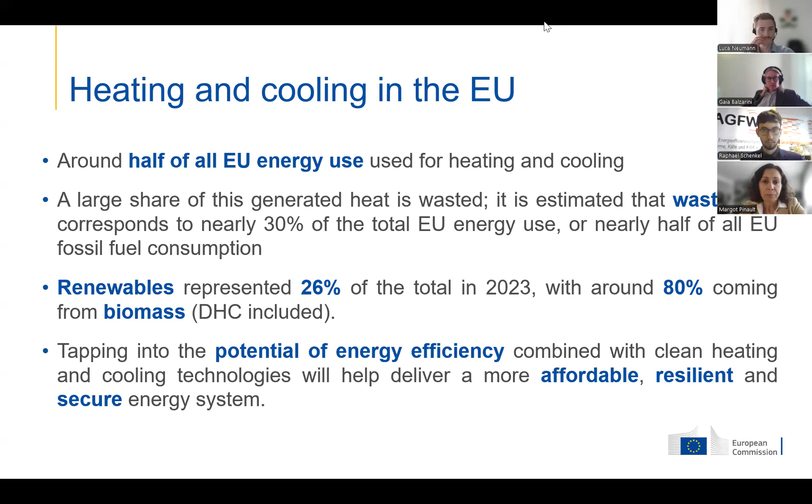Starting from the planning requirements through infrastructure development and deployment, through targets as regards increasing renewables and energy efficiency. So starting with the Energy Efficiency Directive, there are planning requirements for the national level, and what is new is also local level planning that will need to be delivered by all municipalities over 45,000 inhabitants, as of the transposition deadline of the EED.

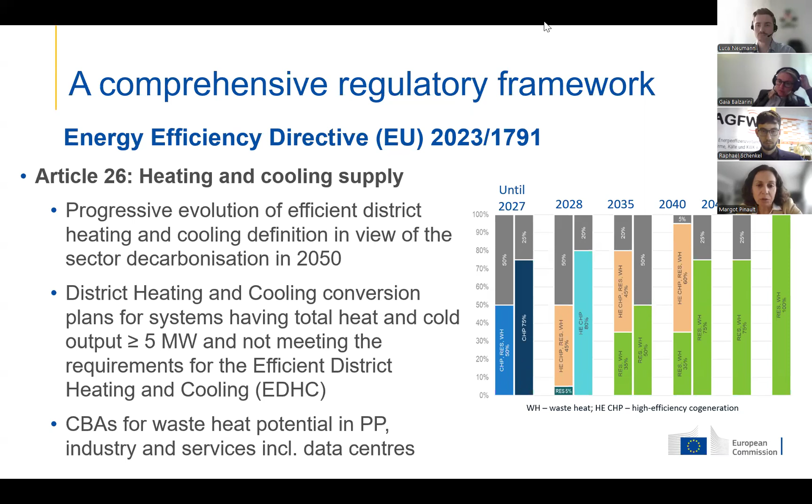In addition, this article includes measures related to waste heat potential assessment. This will be done through the CBAs, cost-benefit analyses, that are mandatory for industries, service facilities, including data centers, and power plants, all of this above certain capacity levels. And this awareness needs to be increased among economic operators: what is the waste heat potential? And then also member states need to link it to the permitting criteria to see how to best use this potential.

Finally, I'm going towards the Renewable Energy Directive, which has strong provisions on increasing the share of renewable energy in heating and cooling. First of all, a binding national target of 0.8% currently and 1.1% as of 2026 of annual increase of the share of renewables in heating and cooling supply. And there is an option also to count waste heat or renewable electricity if driven by the heat pump, but with a cap of 0.4% for each.

Next, there is another target in the RED directive that is non-binding, but that applies specifically to the district heating and cooling sector, of 2.2% per year of increase of renewables in the supply of heating and cooling. But there are many other provisions which are of interest for our discussion today. For example, the cooperation framework between district heating and cooling operators and electricity DSOs.

This is something very important because we would like to see better system integration and better, more regular interactions between these two sectors, especially at local level, because there are joint benefits to be developed. There are services that district heating and cooling systems can provide to the local electricity grid in terms of flexibility and thermal storage. And for this, the regulatory requirements exist already and need to be effectively implemented on the ground, and this will be also in our focus.

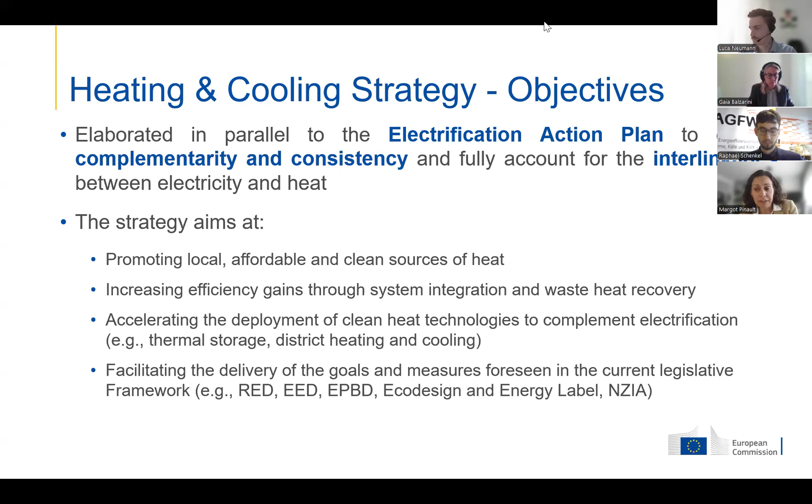So it's really complete, and now we need to make a good use of it and make it effectively implemented on the ground and create the right synergies. So the heating and cooling strategy will focus on planning, networks, efficiency gains, clean heat technologies and resources, affordability, and competitiveness.

We will look at heat as an energy carrier in its own right, with proper planning rules and practice, and also its own infrastructure, its development, financing, with stress on the interactions between the systems of electricity and heat, and better use of waste heat, so that on this continent where we have scarce energy and costly energy, we do not waste energy anymore, and we try to really optimize all the energy flows that we have available.

We'll be looking, of course, at the clean heat technologies deployment. What are the market conditions to speed up this deployment? Starting from heat pumps, but also direct renewable heat from technologies that can grasp the heat from nature, like solar thermal or geothermal.

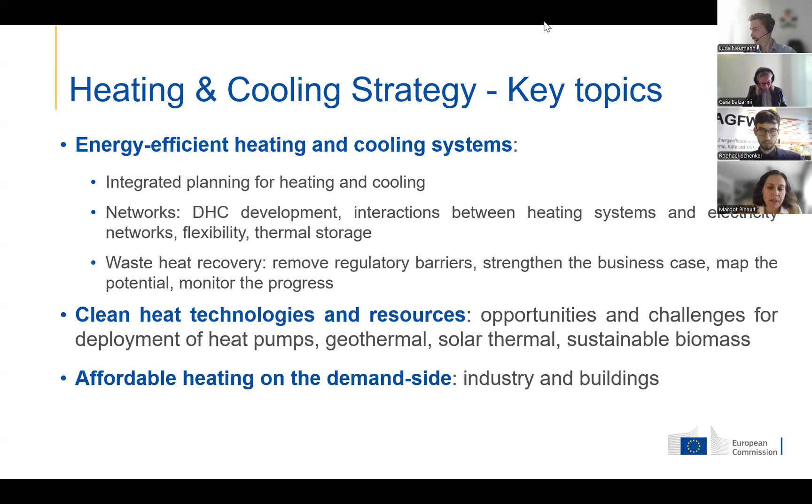That's our aim. So on the timeline, we are currently consulting stakeholders. So you are all very warmly invited to take an active part in the call for evidence that closes in 3 days, on the 9th of October, and in the open public consultation that lasts a little bit longer until 20th of November. We are planning a stakeholder event on the 7th of November, which will be hybrid, but will be in presence in Charlemagne, so the Commission Conference Center. We didn't yet send the registration link, but it will come soon.

And as regards the strategy, it is planned for adoption end of first quarter of 2026, so end of March, I would say. So that's everything that I can present you at this stage, and happy for the further discussion. Thank you very much.

Thank you, Margot. Thank you for giving us this comprehensive overview of the upcoming heating and cooling strategy in the context. Well, with that, I will focus on what are the demands of the DHC sector towards this heating and cooling strategy. I'm not going to repeat the numbers. We have seen it with Margot's presentation.

Heating and cooling is one of the most overlooked sectors when it comes to the decarbonization of our energy system. And if we really want to achieve our decarbonization targets by 2050, we have to transition to clean heating and cooling. And this is not just a matter of cleanly warming our homes or cooling our industries. And we have seen it in the past. It's also a security and geopolitical imperative.

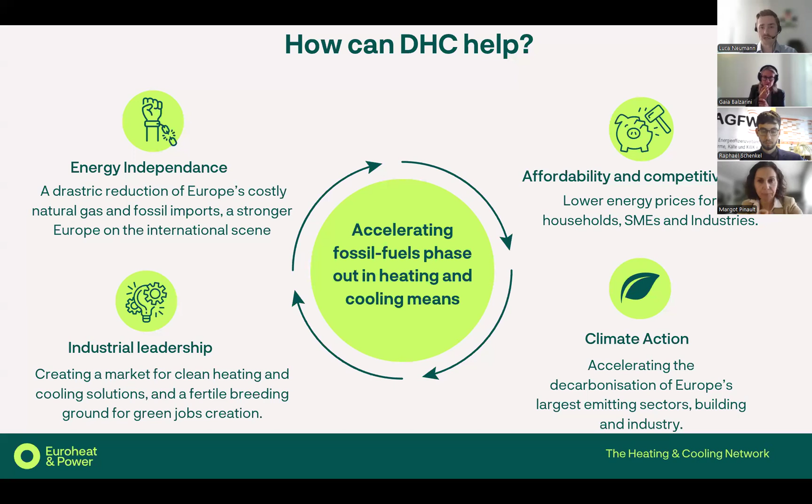So just to sum up the slide, this is how DHC can help with affordability, energy security, competitiveness, and of course, our decarbonization goals. But how can we get there? Well, a study by the University of Aalborg suggests that by 2050, in a fully decarbonized heating and cooling system, we would have to have 55% of district heating and cooling.

So what we need for that is, first of all, we need to lower the energy costs for affordable, clean heating solutions. And one of the ways, because the measures that are mentioned here on the slide are only a cutout of our, let's say, catalog of measures.

One of the ways is to increase system flexibility, and Margot mentioned it, was a more integrated approach to energy systems, which think of heating and electricity infrastructures together. And there, I think it's very positive to see that you are developing the heating and cooling strategy in parallel to the electrification action plan.

We also need to make it easier to access clean heat solutions. I think many people have made this personal experience that when the gas boiler breaks down, it's really not easy and affordable to switch to a clean heat solution. And one way to address this is to help municipalities to fully develop and implement heating and cooling plans. And we'll later see how this is, for instance, happening in Germany. Because heating and cooling plans, they lay out in which community, which clean heat solution is the best choice.

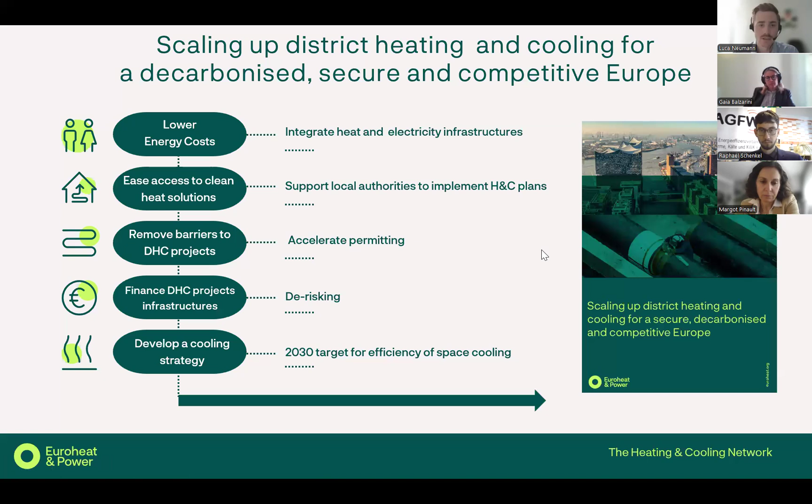I'm not going to dive any deeper, but I invite you to consult after the call, of course, our full position paper on the website. And with that, we're moving over to a hands-on presentation on how we can tap into waste heat recovery. And I hand you over the floor, Gaia.

Thank you. I hope that you can make the transition for me, as I'm not able. I will do that. Yeah.

Thank you. So my presentation is about how to manage and how to provide transparency on the opportunity around waste heat. And this has the ambition to accelerate the transition toward a decarbonized heating and cooling strategy. If you can go to my first slide.

Thank you. Okay, then we start from the elephant in the room, I would say. That's the figure you see here, 2,860 terawatt hours per year is the amount of waste heat that Europe is basically rejecting. How is that rejected? Normally, waste heat is originated in an industrial, but also in a hospital or in a data center, by a cooling process that is rejecting the energy that is needed in order to cool down that specific process.

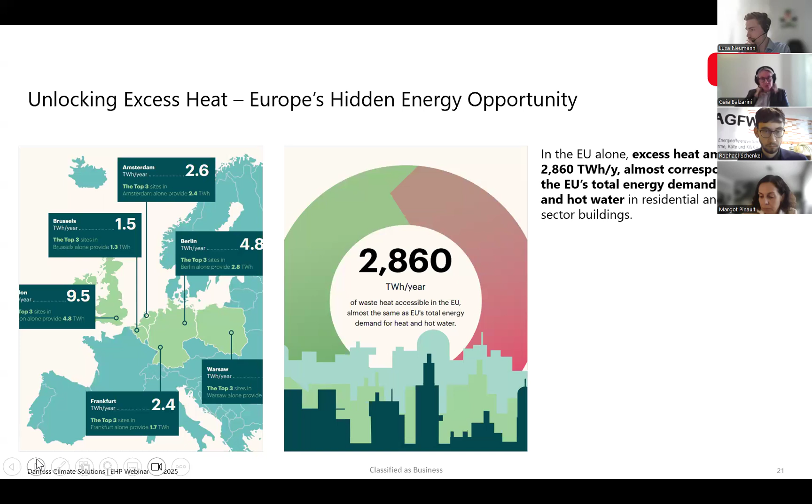And to give you a size of this value, basically these 2,860 terawatt hours correspond to the European total energy demand for heating and hot water production in the residential and service sector buildings. This is really a huge opportunity that we are missing. On the left side of this slide, I have reported the typical need of energy in several different capitals. And basically, you can see that the top three rejectors of waste heat could cover that need just by having three players delivering waste heat recovery to the network. If you can go to the next slide, please.

But why is that? Why is it that on a global level, 72% of the energy is currently lost or rejected? That's first of all because we are missing familiarity and awareness around the opportunity of waste heat recovery, around the business case of waste heat recovery, but also we are not really familiar with the legal framework that is needed to be assisted in that kind of investment.

And then we all know we are still dealing with very high electricity prices. And why is electricity involved? That's because in most cases heat pumps are needed to improve the quality or the temperature of the waste heat recovery system to the level that is needed by the user or the district heating network.

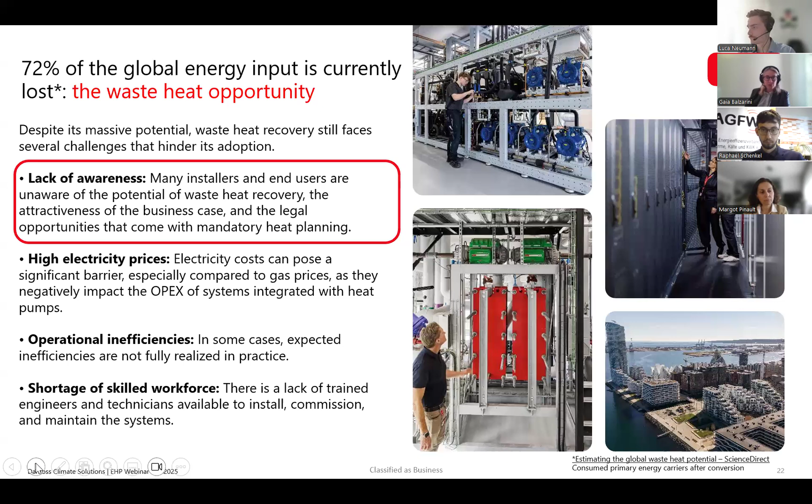And then the third element that we need to take into account is that designers and installers still lack skills to properly design, install, commission and maintain the system. And this is leading to operational inefficiencies that are affecting a little bit the credibility of this technology, which at the end, from a technological perspective, is using consolidated components. So it's a pity. Next slide, please.

For this reason, at Danfoss last year, we have invested resources to develop a tool which is called the Heat Recovery Tool. That's a free tool. You can get access from our website. I have added a QR code that you find on this slide here.

And this recovery tool is basically providing all of this missing information that is normally needed for a potential investor or stakeholder to decide whether it makes sense or not to invest in a waste heat recovery system. And basically what we do, I have here on the right side of the slide an example of a traditional system where there's a consumer of heat, maybe for heating a building, that is previously using heat from a traditional boiler, and instead we look at reusing the excess heat.

Let's take the example of a hospital, from the cooling system of the hospital, that through a heat pump can be recovered and then directed immediately into the building. But as most of the time the need of the building will be more than covered, the remaining part can be directed into a district heating network that at the end enables the full efficiency of the recovery system, and this makes the business case positive.

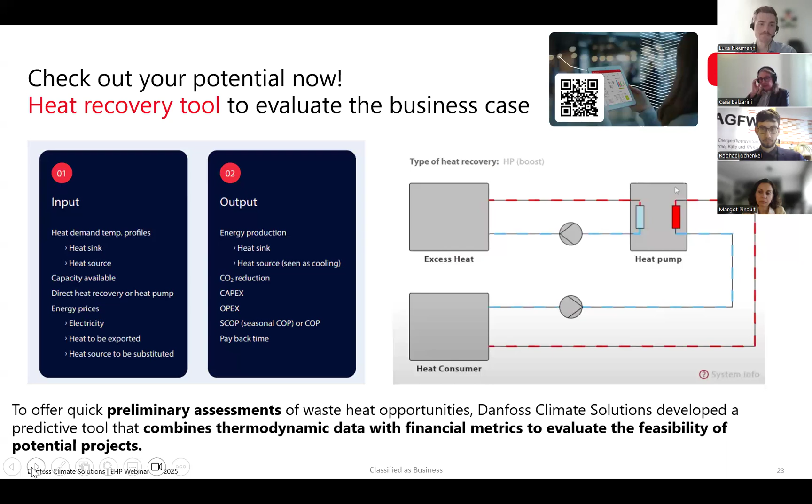So all of that information is very difficult to calculate for most investors, and we really hope that having such a tool will push and promote the use of waste heat much more in the future. Next slide, maybe we can also discuss in the dialogue afterwards, but basically the idea that we have is that in the future we have to lose much less primary energy. And how can we make it happen?

I think we have the technology available, but we need to look at the opportunity of the new heating and cooling strategy together with the directives, and see how they can fit together to promote a shift in the use of the energy sources that we have. For example, the mandatory heat mapping for municipalities will provide transparency and will promote the use of waste heat where available. And then having guidelines, good definitions on on-site and off-site recovery, and obligations and incentives when the mapping shows there's an opportunity to use waste heat in a specific municipality, and that all viable projects have to be supported when there's a positive business case around it.

And then for sure the technological progress is given, because investing in high efficiency heat pumps will help improving performance and return of investment. Thank you.

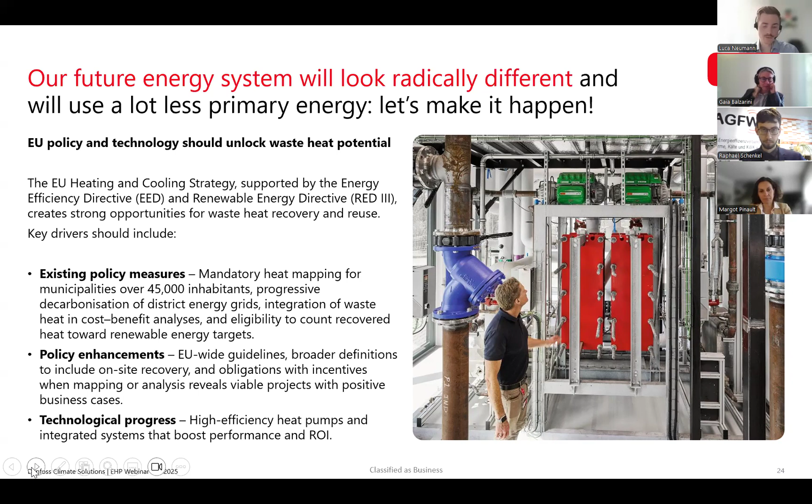Thank you very much, Gaia, for this hands-on example of how the DHC sector can advance the clean heat transition with waste heat recovery, for example through free tools such as yours. So to better understand how we can create the conditions for the deployment of clean heat solutions, I now hand over to Raphael to give us his insights on heating and cooling plans in Germany and what we can learn in Europe from this.

Thank you so much, Luca. Welcome from my side as well. I speak for AGFW, the German District Heating Association, the equivalent of Euroheat and Power for the German level. I will speak about heating and cooling plans in Germany mainly. So we have a law for heating and cooling plans in Germany, and now just for you to understand the state actor levels.

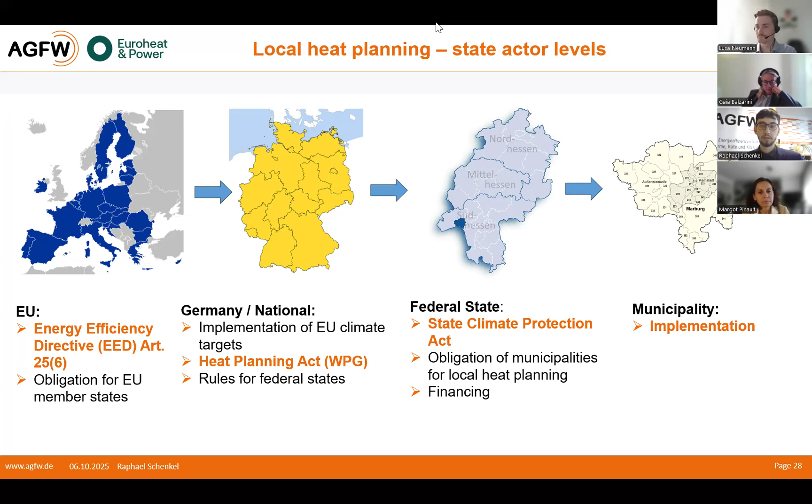As Margot described, the Energy Efficiency Directive has this obligation for heating and cooling plans in the EED. Then this has to be transposed on the national level, and it has been done already in the German Heat Planning Act, the Wärmeplanungsgesetz. This law then rules for the federal states, because in Germany we have 16 federal states, and they are obligated to write local state climate protection acts. And in these state climate protection acts is again the obligation for the municipalities. So in Germany, it's these 4 levels. In other European countries maybe only 3. And in the end, the municipalities have to implement and write these plans.

What is written in the Heat Planning Act? The municipalities all must create a heat plan for the future target of climate neutrality in 2045 in Germany. And there are 2 thresholds. Big municipalities above 100,000 inhabitants must finish their plan by mid-2026. Smaller municipalities by mid-2028.

And what must be in the plan? They need to identify what the heat status quo is in the city and what measures to improve. They have to outline different areas, like which heating technologies would be suitable there, and how to implement that. And then at the end, they arrive with such a plan.

This is now just for a model city. And then they will maybe draw up a plan. Okay, in the middle, the highly densely populated area is for district heating, the red area. In the blue area, there's maybe industry, and they will have hydrogen at some point or other climate neutral gases. And the yellow areas are for individual solutions, mainly heat pumps.

And it also includes obligations for district heating networks to have a certain share of sustainable heat from renewables and waste heat. And the thresholds here are 30% sustainable heat in the year 2030, 80% in the year 2040, and 100% climate neutral in the year 2045. So this is then like an indirect implementation of Article 26 of the EED.

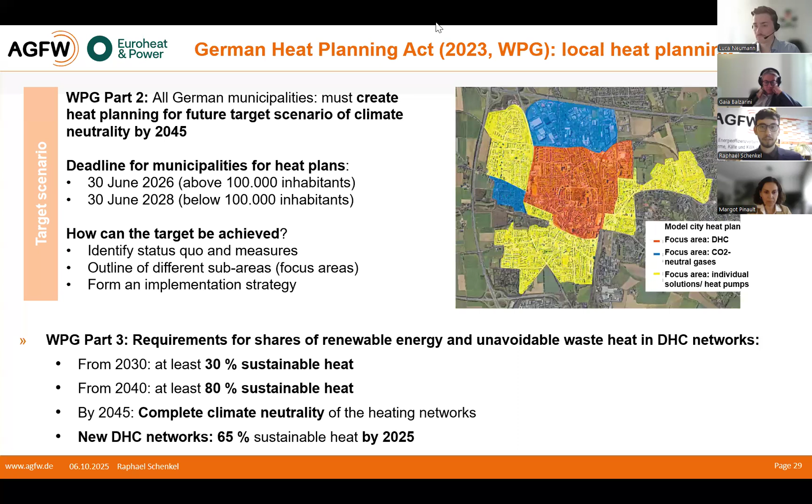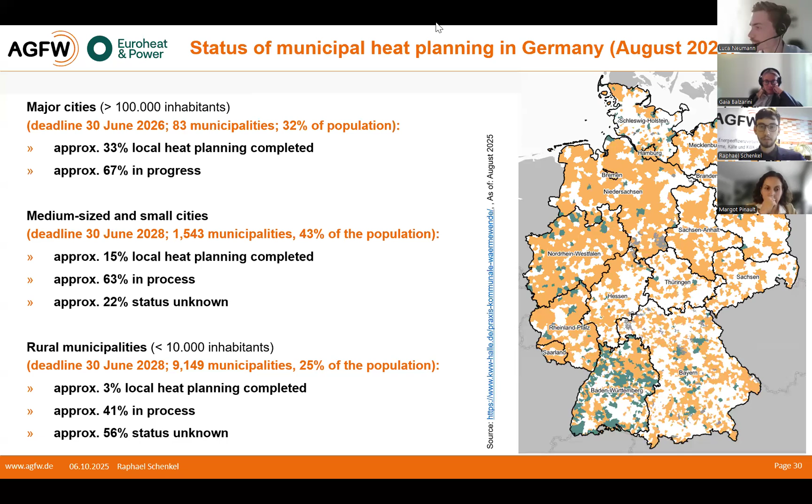And the small municipalities, over half of them, we do not know. The status is unknown. So this will probably take some time. But yeah, as you can see, it's very well on the way in Germany. Some Bundesländer like Baden-Württemberg on the bottom left are already very far.

Now I have a few priorities from our side for the heating and cooling strategy. I hope Margot and the Commission are listening. So we do not want changes to the existing regulatory framework. Our members want to invest now. They want the stability of EED, RED and EPBD, to invest in new heating technologies and so on. And that takes, of course, 5 to 10 years at least. So we need some time to do that.

The second big thing is we need cost reduction also for district heating and the district heating sources, because we want affordable heat. One idea: in the Affordable Energy Action Plan, the Commission recommended member states to reduce the VAT for electricity. And we would like the Commission to also ask that for district heating as a second big pillar of decarbonisation. Of course, the member states must decide that at the end. That would be one idea to reduce the costs.

Another idea, reduce costs for renewable electricity for district heating, so that electricity taxes and grid charges are reduced for large heat pumps and electrode boilers. We need insurance schemes for specific technologies with state guarantees, especially for geothermal, when you drill and there's a risk that you will not find a suitable heat source, or industrial waste heat, because the steel smelter can just decide 5 years later to relocate outside the European Union, and then you have a problem as the heat provider.